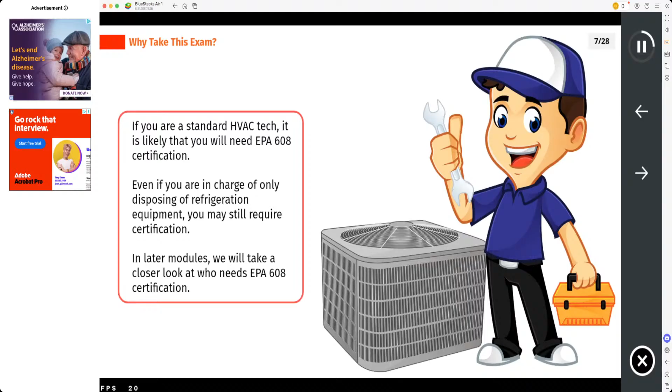The law is subject to change. The EPA may update regulations to make them more strict.

I ain't gonna lie. Damn. Yeah, I'm saying all of these. Fucking all of these.

There are 4 types of EPA 608 certification. All types of EPA certification include EPA Core, which comprises essential content necessary for all certifications.

The type of certification that you will need depends on what types of systems you will be working on. The 4 types of certification are Type 1, Type 2, Type 3, and Universal. All EPA certifications contain 25 questions from EPA Core.

Oh wait, 25 questions, that's it? Ooh, I didn't know. Let's go back, you're moving too fast.

For example, if I want Type 1 certification, there will be 25 questions on the content on EPA Core and 25 questions on Type 1 specific content.

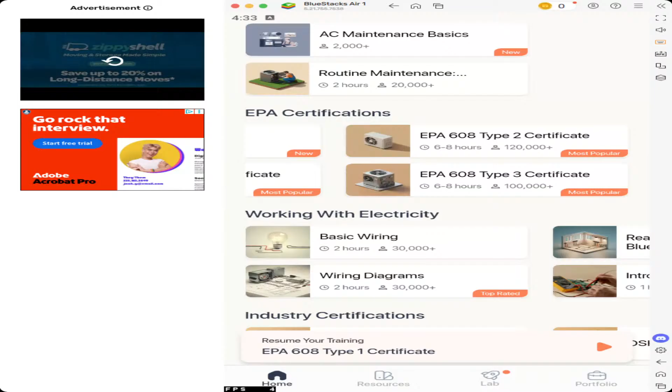What? Yeah, we wanted Type 2. What the? Good for you. So like, oh my God. Oh yeah. It's like the Holy Grail here. Damn. Why would I want a 609?

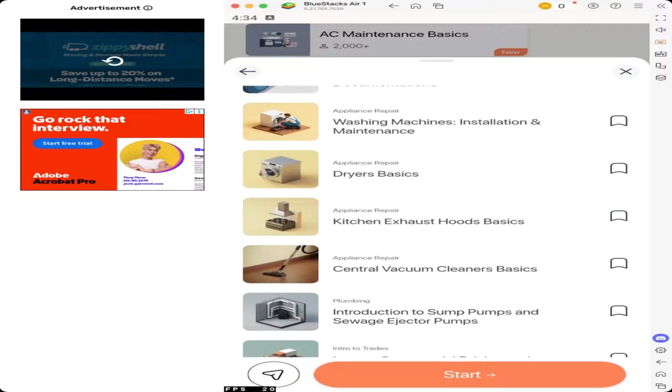All right, fuck it, we going big. Fuck it, we getting it. It's a lot of information. This is the first lesson? Real? I guess this assumes you already had prior knowledge.

This module brushes up on the physical concepts that are the foundation of how refrigeration systems work.

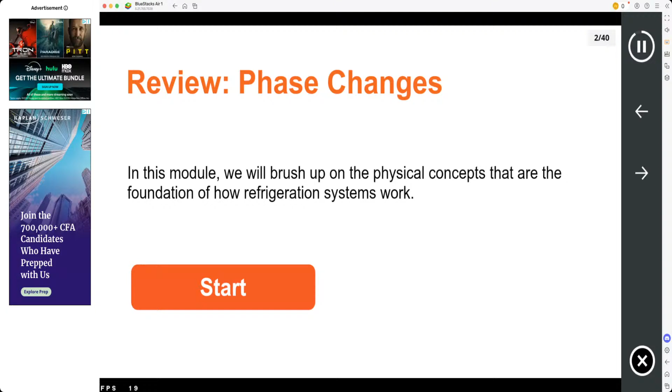The state that a substance is in depends on both its temperature and pressure. If we change the pressure, temperature, or both, we can change the state of the substance.

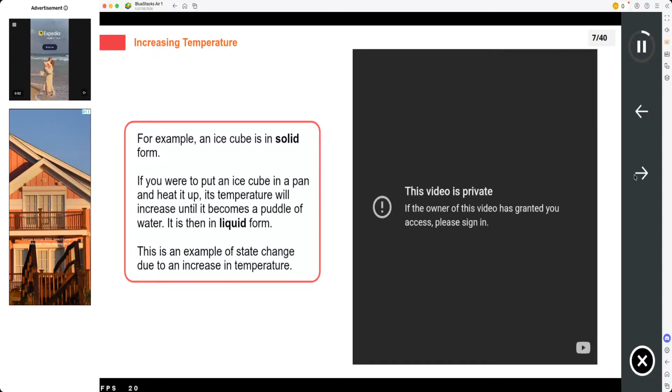For example, an ice cube is in solid form. If you put an ice cube in a pan and heat it up, its temperature will increase until it becomes a puddle of water. It is then in liquid form. This is an example of state change due to an increase in temperature.

In the same example, as you continue to heat up the water, it will increase in temperature until it bubbles up and becomes steam. The steam that leaves the pan is water in its vapor phase.

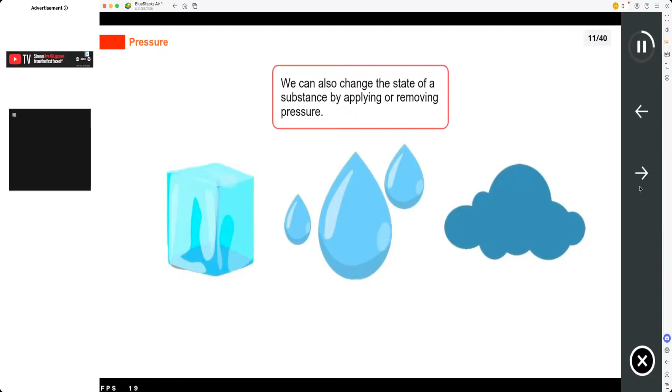Decreasing temperature can also change the state of a substance. We can also change the state of a substance by other means.

As mentioned in the video, increasing the pressure acting on a bubble changes the vapor to liquid. Decreasing the pressure acting on the bubble changes liquid to vapor.

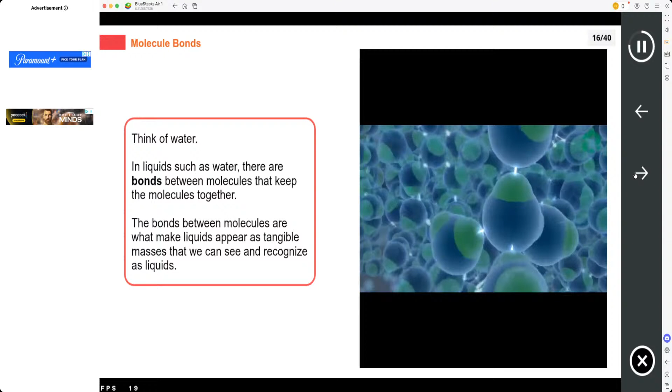Recall that temperature is a measure of how fast the molecules are moving in a substance, on average. The higher the temperature, the faster the molecules are moving inside the substance. For example, molecules in a hot coffee would be moving faster than cold coffee.

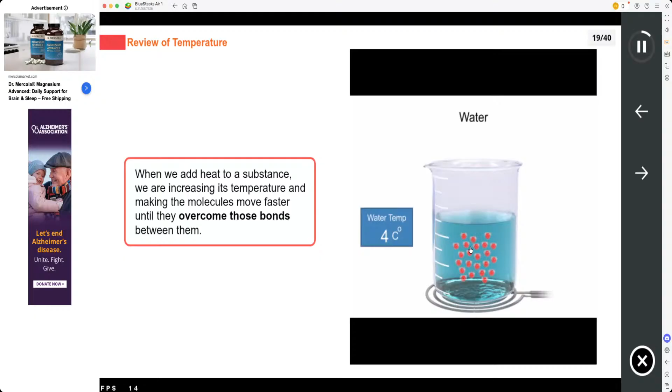When we add heat to a substance, we are increasing its temperature and making the molecules move faster until they overcome those bonds between them.

As temperature increases, the molecules overcome their bonds, and they no longer form a liquid. Instead, by overcoming those bonds, the molecules undergo the process of boiling.

Remember, we need to add heat to a liquid. This heat is drawn from the surroundings.

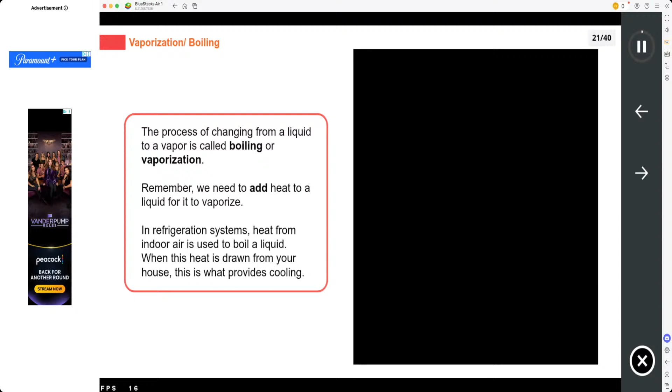The boiling point is the temperature where a liquid changes phase to a vapor. Each substance has its unique boiling point depending on its physical properties.

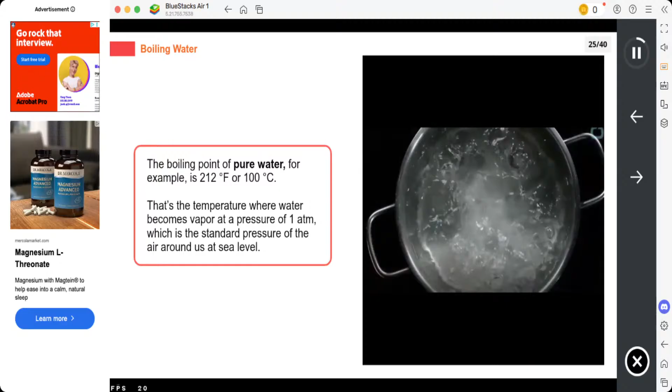Recall that the boiling point of a substance depends on pressure. The boiling point of pure water, for example, is 212 degrees Fahrenheit. Note that the boiling point will be different if your substance is not pure water. If we are heating up pure water and the temperature doesn't reach 212 degrees Fahrenheit, the water will not change to vapor.

If the temperature of the water is close to 212 degrees Fahrenheit, you will see a few bubbles forming. This is because the bottom of the pan is in contact with the heat source, so it gets hot faster than the top of the pot.

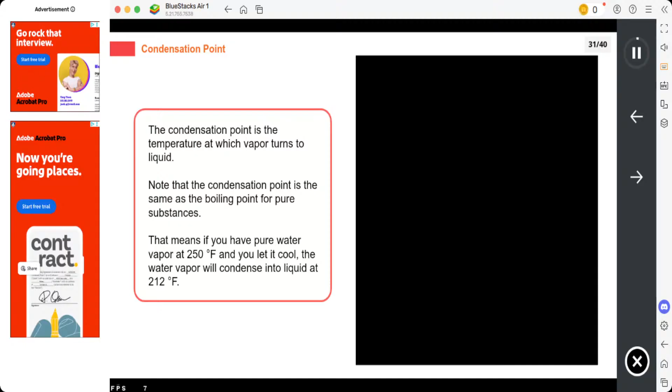The condensation point is the temperature at which vapor turns to liquid. Note that the condensation point is the same as the boiling point for pure substances. That means if you have pure water vapor at 250 degrees Fahrenheit and you let it cool, the water vapor will condense into liquid. Both the boiling point and condensation point are properties of pure substances only.

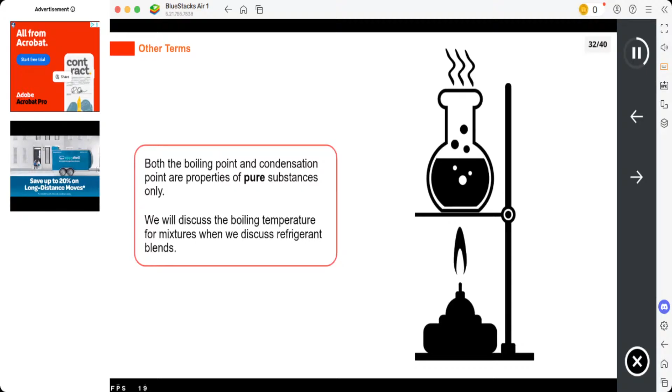As the temperature of a substance is decreased, the substance also changes state.

Condensation occurs when temperature is decreased, changing vapor to liquid. To reiterate, you need to remove heat from a substance to change state from vapor to liquid.

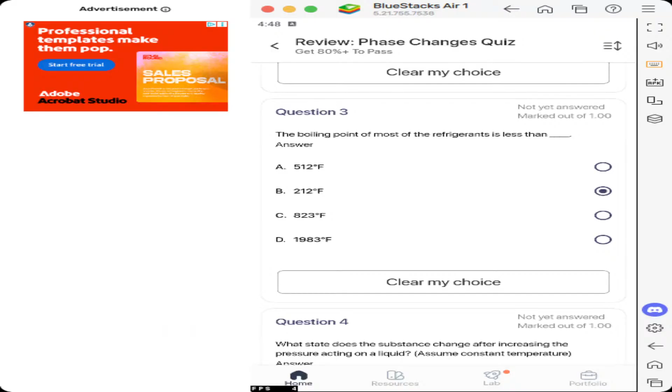212 degrees. Oh wait, hold up. Not gonna lie, I don't know that. No, I'm not gonna lie to you. Hold on.

So we can do this until the test. The test is proctored. It's not an exam, we're good. With the exams...

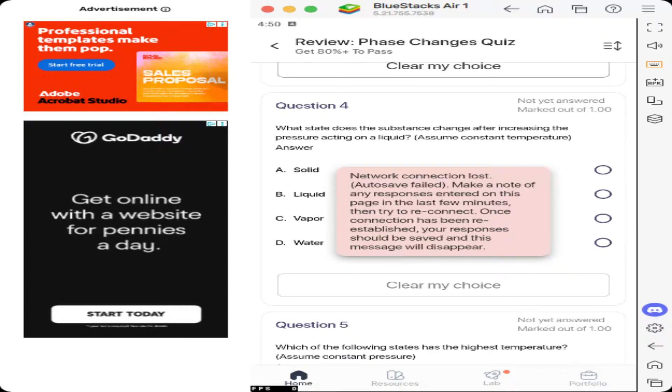In this module, we will go over the refrigeration cycle and how it works to provide cooling. We will use the concepts we talked about in the previous module to understand this. The refrigeration cycle is what makes your air conditioning, refrigerator, or any other refrigeration system work.

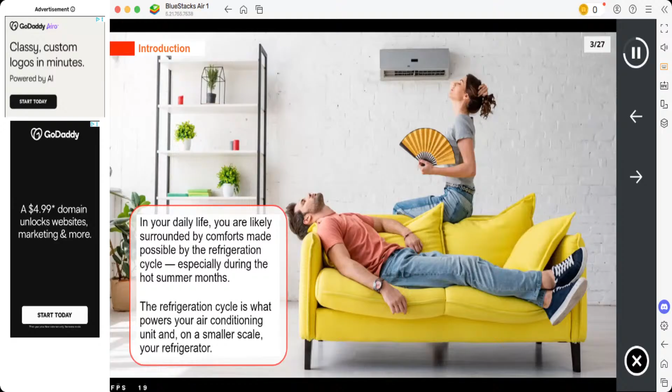In your daily life, you are likely surrounded by comforts made possible by the refrigeration cycle, especially during the hot summer months. The refrigeration cycle is what powers your air conditioning unit and, on a smaller scale, your refrigerator.

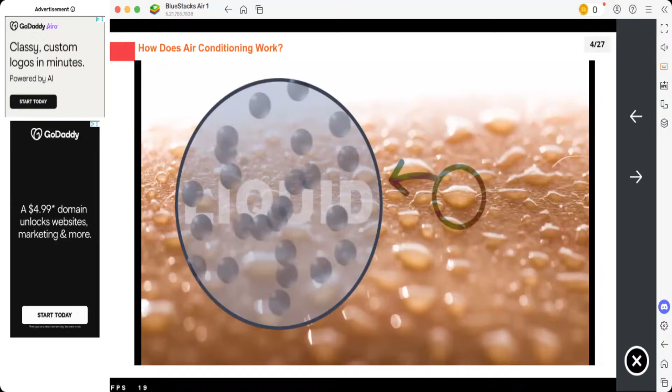The molecules in a liquid are held together by weak intermolecular interactions. Not quite chemical bonds, just enough passing attraction to keep them from flying apart. Some of the molecules absorb enough heat energy, in other words they get moving fast enough, to overcome these intermolecular attractions, escape, and take gaseous form.

That's the reason you feel chilly getting out of the shower, and why we sweat to stay cool. The water has to absorb heat to evaporate, and it carries that heat away from you.

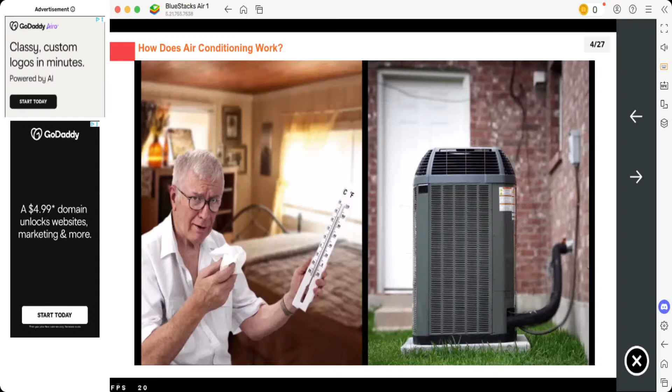An air conditioner's basic job, then, is to use a fluid called a refrigerant that constantly changes from a liquid to a gas and back to a liquid again, to move heat from one place, like your sweaty bedroom, to another, outside, where it's already hot and miserable anyway, so who cares?

Here's an admittedly very simplified version of how most AC units work. The liquid refrigerant flows through a series of coils exposed to the air in your home. The refrigerant has a low boiling point, so the heat from the interior air is enough to make it turn into a gas, which means there's now more heat in the refrigerant and less in the air. A fan blows that colder air into your room, or straight into your face.

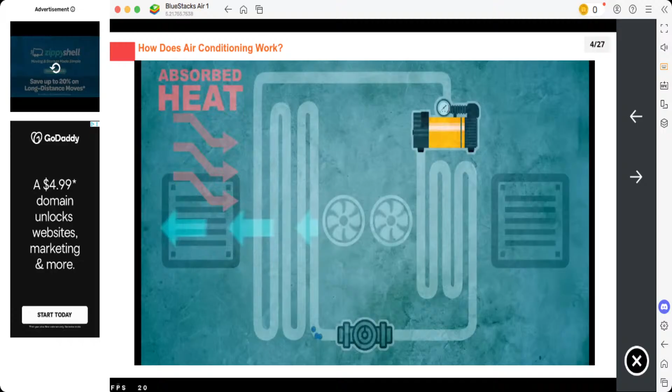We're not judging. So now your AC has to do two things: dump the heat absorbed by the refrigerant outside, and condense the refrigerant back into a liquid so it can be used again. To do those things, it uses a compressor to ramp up the pressure on the gaseous refrigerant, so much that it can condense into a liquid again, even though it's at the warmer outside temperature.

As it condenses, the refrigerant loses heat to the air around it, which another fan blows outside where it's already all sticky anyway. Which is a neat trick, boiling something at a low temperature and then condensing it at a high one. Nothing in thermodynamics is free, and the compressor needs energy to do the work of compressing the refrigerant, which may explain your power bill in July.

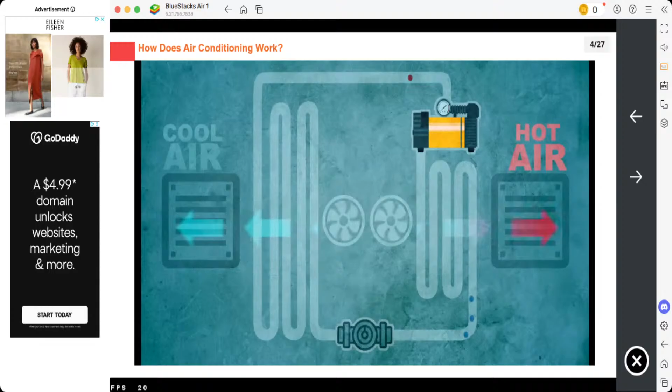After the refrigerant condenses, the air conditioner backs off the pressure with an expansion valve, so that the refrigerant can boil at the lower temperature again, which it does, in a loop, over and over, until your home reaches the temperature you set the thermostat to, or your housemates complain and switch it off because, what are you, a polar bear or something? Jeez. While the refrigerant could be practically any substance, there are some chemicals that do the job better than others, and these refrigerants have a checkered history.

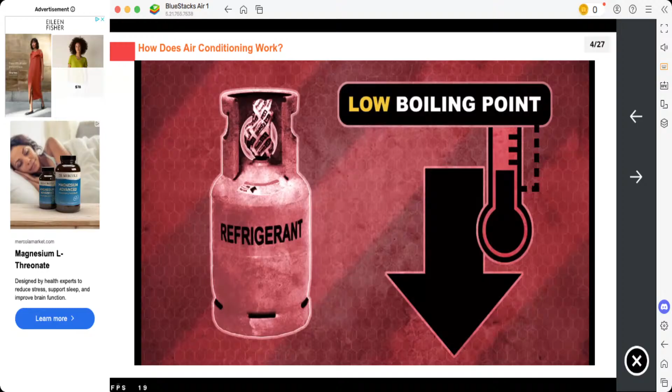A refrigerant needs to have a pretty low boiling point, and one that can be adjusted to where you want it by changing the pressure on it. It should also be pretty good at conducting heat and be able to absorb a lot of heat as it boils. And then it needs to be cheap, widely available, and as non-flammable and non-toxic as possible. That all kind of narrows your choices of chemical.

Scientists thought they'd found the perfect refrigerant with Freon, which is the trade name of a group of chemicals called chlorofluorocarbons. But CFCs are actual murder to the ozone layer. They've been largely replaced with hydrofluorocarbons, or HFCs. HFCs don't damage the ozone layer, which is good, but they have a different problem: they're greenhouse gases. So the search is on to phase out HFCs too.

Whatever we use in the future, it doesn't seem likely that we'll give up on AC altogether. Not in a scorching summer like this one.

Definitely learned something. As mentioned in the video, air conditioning works by absorbing heat from your indoor air and ejecting it outdoors. It uses a refrigerant to do this. A refrigerant is usually a liquid that's used in refrigeration systems to absorb heat.

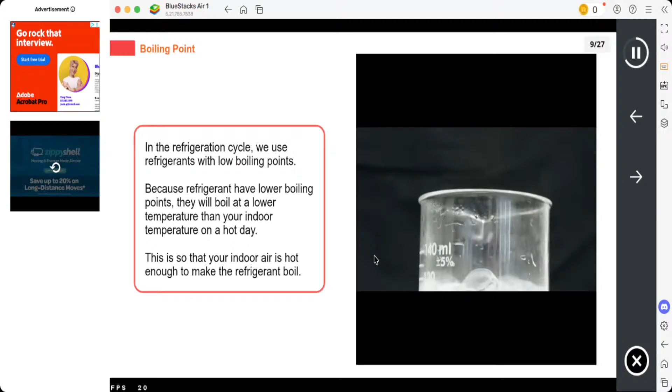It does this by passing a refrigerant with a low boiling point through a series of coils that come in contact with warm indoor air. Recall that a boiling point is the temperature at which liquid turns to vapor. In the refrigeration cycle, we use refrigerants with low boiling points. Because refrigerants have lower boiling points, they will boil at a lower temperature than your indoor temperature on a hot day. This is so that your indoor air is hot enough to make the refrigerant boil.

For example, a hot summer day would be around 90 degrees Fahrenheit. A typical refrigerant, R134A, has a boiling point of minus 15.34 degrees Fahrenheit. Since the hot summer air is above the boiling point of the refrigerant, it would boil at that temperature.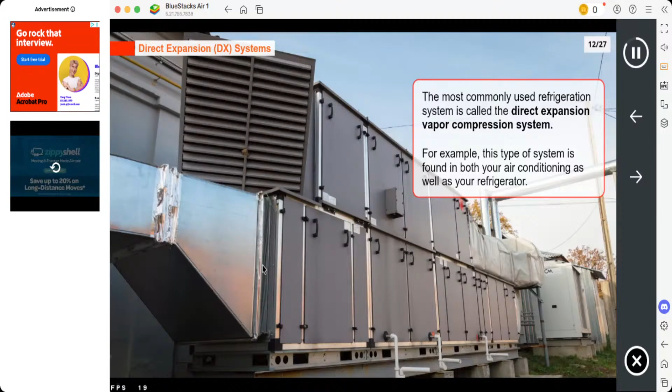Direct expansion systems are systems where the cooling effect comes from the expansion of a liquid to a vapor. If we think about water vaporizing to steam, the steam rises up and fills the air. This is the expansion behavior of vapors.

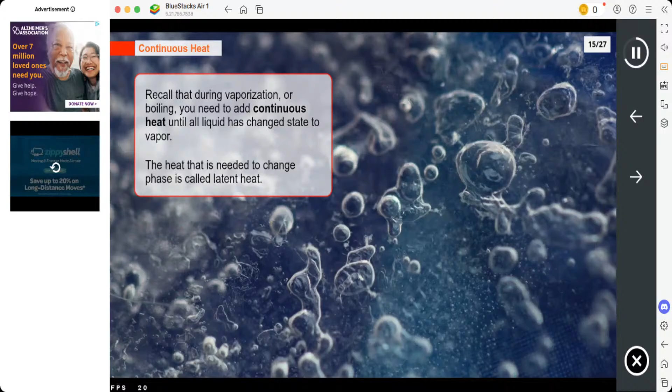As the refrigerant boils, it changes state from liquid to vapor. This process is also called vaporization, as the refrigerant is changing from liquid to vapor. Recall that during vaporization, or boiling, you need to add continuous heat until all liquid has changed state to vapor. The heat that is needed to change phase is called latent heat.

Think about boiling a pot of water. You apply heat to it by turning on the stove, which increases the temperature of the water. Once the water reaches its boiling point, it starts to bubble and turn into steam, which leaves the pot and dissipates into the air.

If you keep the stove on, you are continuously applying heat to water that is already at its boiling temperature. More and more water molecules will become steam, also known as water vapor. If the stove is left on, the water in the pot will decrease until all the water eventually turns to vapor. You've probably seen this if you've accidentally left the stove on too long. Either the pot has completely dried up or there is much less water than before. This is because water has changed state into vapor.

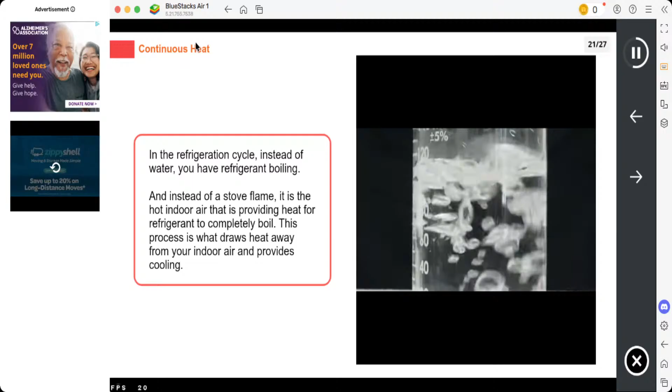In the refrigeration cycle, instead of water, you have refrigerant boiling. And instead of a stove flame, it is the hot indoor air that is providing heat for refrigerant to completely boil. This process is what draws heat away from your indoor air and provides cooling.

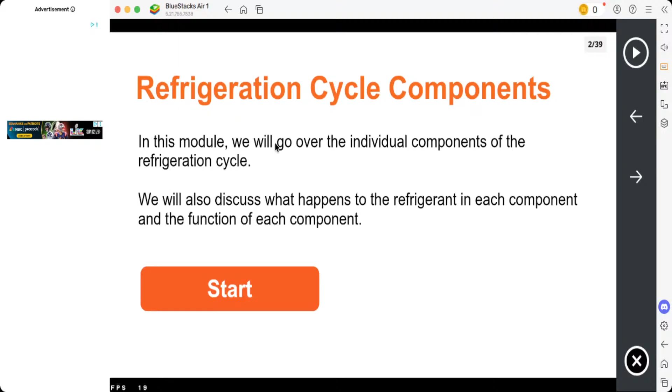Aside from the refrigerant flowing through the system, the four key components of a refrigeration cycle are: evaporator, compressor, condenser, and metering device, also known as a thermal expansion valve, or TXV.

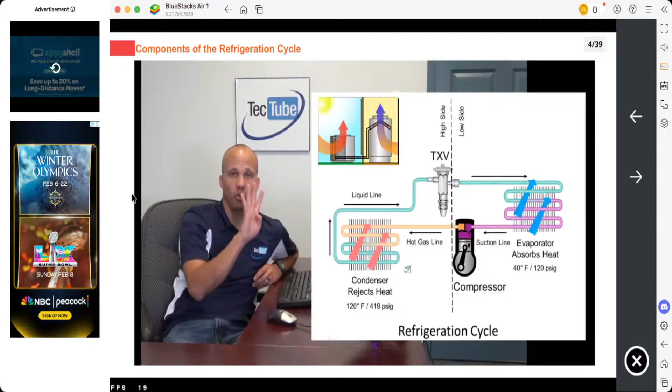So when I look at the piping diagram here, I have four major components on a refrigeration cycle. I have my condenser coil out in your yard, that's part of your condensing unit. I have a compressor, which is also part of your condensing unit. Then inside the building, I have my evaporator coil and my TXV. The TXV and evaporator coil are typically in one assembly as well. So visually it looks like I have two things, but really there's four major components of the refrigeration cycle. The condenser coil and the evaporator coil are doing opposite jobs of each other, and the TXV and the compressor are doing opposite jobs of each other.

Evaporator coils absorb the heat. Compressors compress the refrigerant.

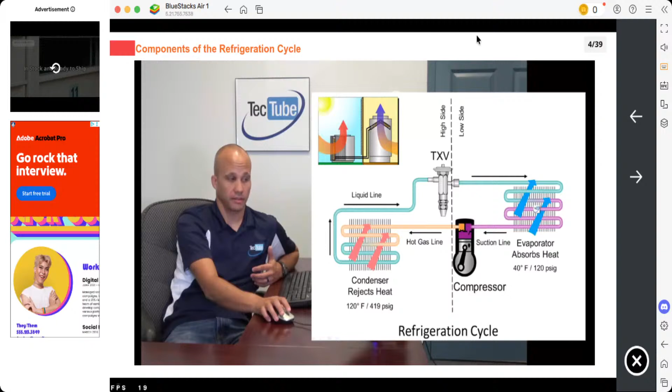You notice we have some of the pipes labeled on here. The hot gas line between the compressor and the condenser, you don't normally see that. That is internal to a condensing unit, because the condensing unit, if you recall, has the condenser coil and the compressor all in one. So you don't see that hot gas line typically. The liquid line and the suction line are the two lines that you see going from outdoors back indoors to the inside the building. And then the line between the TXV and the evaporator is typically all in the evaporator coil as well, so you don't see that unless you take the cover off.

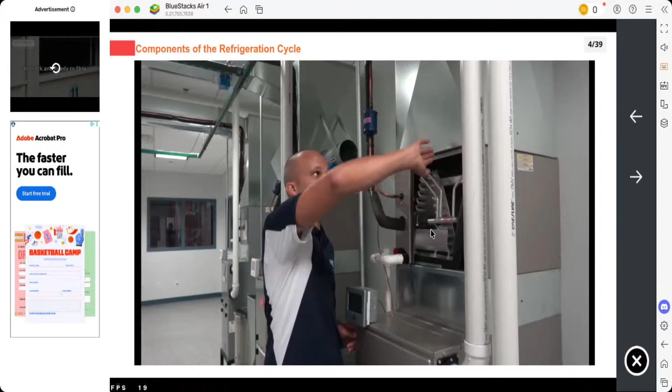Here we are in the lab. We have a furnace with an evaporator coil on top of it. Air from the building or the home is coming through the furnace, because that's where the blower motor is, running air through the evaporator coil, where the evaporator coil can absorb heat from the building, and then the air gets cooled down, obviously, when we give up its heat and gets ducted out to the supply. So that heat goes into the evaporator coil, and then that heat will make its way through the suction line, in our case, up over the ceiling in the lab here, and it'll come down into our condensing unit.

And then as it comes into our condensing unit, the suction line goes into the compressor, where the compressor increases its pressure and hence increases its temperature. Then it leaves the compressor on the hot gas line.

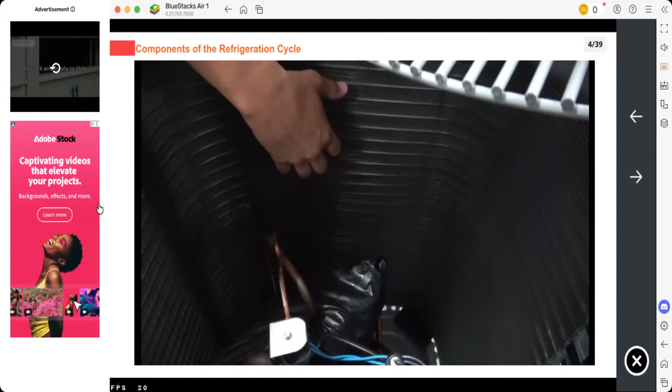If we follow that pipe all the way around, that hot gas line goes into the condenser coil, where it can use all this surface area to reject the heat to the outdoors. And then when it comes back out of the condenser coil, it goes into the liquid line.

The liquid line will make its way back through the piping system, back into the indoor side of the building, and it'll come in this way, going into our TXV. The TXV's job, once again, is to lower the pressure and hence lower the temperature.

So we have cool refrigerant entering the evaporator coil, where it's now cool enough that it can absorb more heat from the air. And then that cycle will repeat itself, hence why we call it the refrigeration cycle.

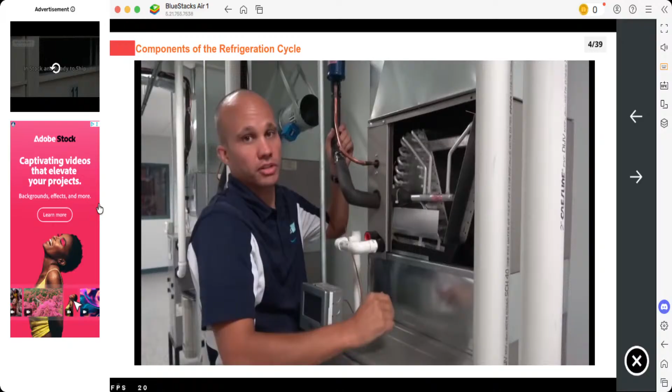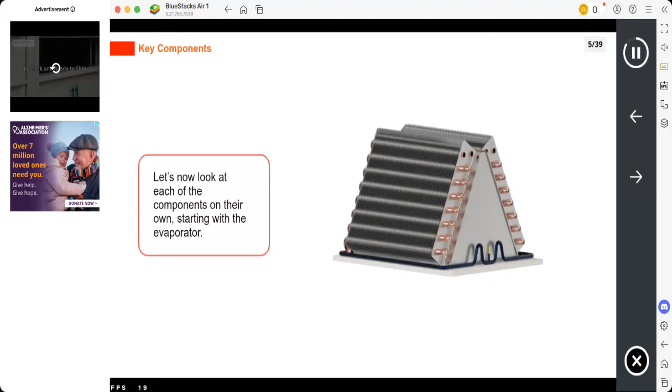Oh yeah, refrigeration cycle. We love the refrigeration cycle. Not venting gases into the air and stuff like that. With the evaporator, love that. Imagine me locking in on this today. I'll put in a 12-hour shift on this.

I don't care. In my basic refrigeration description, I talk about the evaporator as being the heat absorber.

My collar's blue and my neck is red.

That's really what we're trying to do when we're attempting to cool something: we make the evaporator coil a lower temperature than either the room or the box and the air going over it, so heat goes out of that room or refrigerator box or freezer and is attracted into that evaporator coil. For most typical basic systems, we're just flowing air over the evaporator coil, over those fins, and as it passes across that metal and the refrigerant moves through, it's absorbing heat through the metal into the refrigerant.

The fins on those coils that you'll often see act as additional surface area to give it a little bit more contact time, so that as that air is passing over, it has more contact time on the metal, so the refrigerant inside that evaporator coil can absorb heat.

That's it? Where's the rest of it?

The evaporator is located inside the home. This is where refrigerant absorbs heat from indoor air, changing from liquid to vapor.

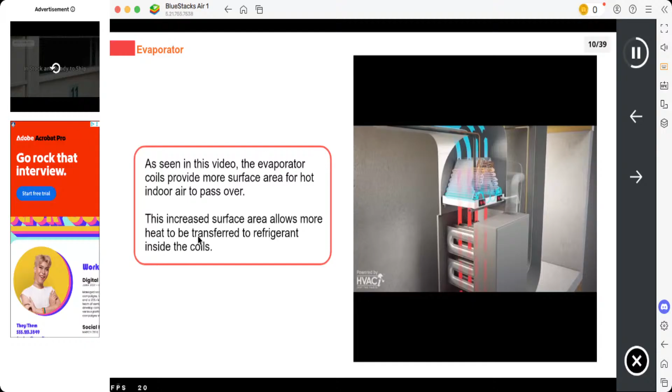As seen in this video, the evaporator coils provide more surface area for hot indoor air to pass over. This increased surface area allows more heat to be transferred to the refrigerant inside the coils.

Refrigerant gets extra heated past its boiling point, which makes it superheated vapor by the time it leaves the evaporator. This change into a superheated vapor state is indicated in the color change of the coils from blue (liquid) to red and yellow (vapor). Vapor refrigerant is let out from the evaporator to the next component, the compressor.

Okay, we, shit. Metering device. Compressor.

Talk about this in a metaphor. Imagine the room that you're in right now, whatever room you're in, it's got the four walls that surround you, and then it's got the ceiling. Now imagine that this room you're occupying is full of ping pong balls, and these ping pong balls bounce around perpetually, always bouncing. These ping pong balls signify molecules, and the energy that these molecules contain that causes them...

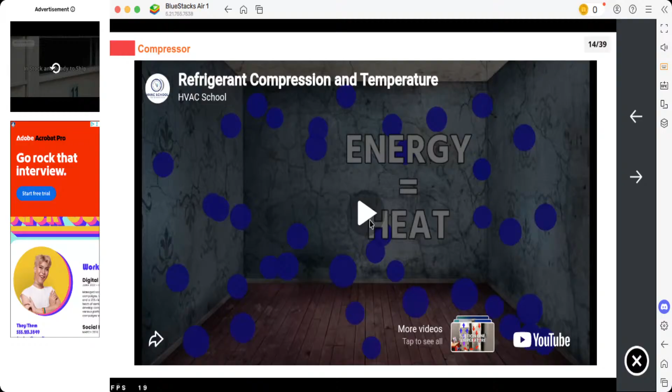Nah. Alright bro, these ain't ping pong balls doing that, man.

To bounce around, that's heat. But the speed those molecules or ping pong balls are moving at, that is temperature. In fact, temperature literally is average molecular velocity. I talk about this a lot on the podcast and in these videos. So when you feel something as hot, what you're really feeling is those molecules bouncing around or vibrating very fast in that thing you touch. When you touch that hot stove, you're literally coming into contact with molecules that are bouncing around really fast.

Your fingertips bounce around really fast, which can be quite uncomfortable, cause burns. So when we experience temperature, we are literally experiencing the molecular velocity of whatever substance. This little bottle of water, the temperature that I feel, my fingers are experiencing through conductance the molecular velocity, or the speed that the molecules are moving.

So back to our room. You have this room full of ping pong balls that are bouncing. The amount of overall energy that they contain is the heat. The speed that they're moving is the temperature, and the ping pong balls themselves are the molecules. In this case, it's refrigerant.

Now imagine that one of these walls begins moving in, sort of like the scene from Star Wars where the room is getting smaller and smaller and it's supposed to be crushed. So as the wall moves in, what happens to these ping pong balls? Do they speed up or do they slow down?

This wall, as it moves in, is working against the force of those balls bouncing off of it. And as it does that, the speed of those balls as they bounce against the wall and against each other starts to increase. The molecular velocity begins to increase, and so the temperature increases. Because again, remember, molecular velocity is temperature, the same thing.

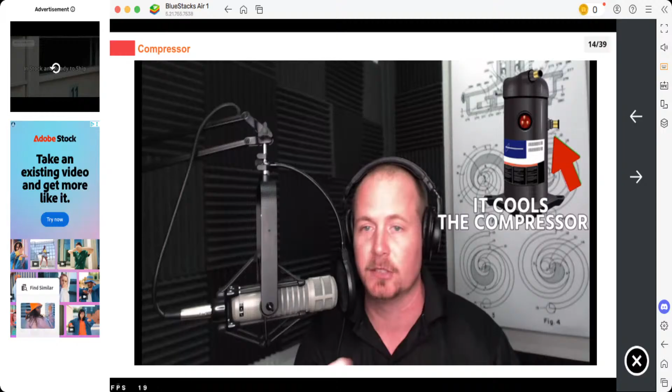And so that's what's happening inside of a compressor. If you think of this scroll compressor behind my shoulder, it goes in as vapor. In fact, how it really works inside a compressor is the suction line refrigerant drops into a refrigerant-cooled compressor's shell. It cools the compressor, kind of mixes with the oil, and then it's pumped out into the head where it's discharged.

There is some heat added to the compressor itself to cool it from the different parts inside, the friction, the bearings, and all that. There is some heat generated there, but really the bulk of that temperature change that we're seeing, say on average on an air conditioner, an average suction line temperature would be about 50 degrees. Then coming out of the compressor you'll commonly see about 165, 170 degrees. So that's a significant difference in temperature, say a 120, 130 degree differential.

And that differential is representative primarily of that heat of compression, which is, as the compression chamber gets smaller and smaller, the molecules in there are bouncing faster and faster.

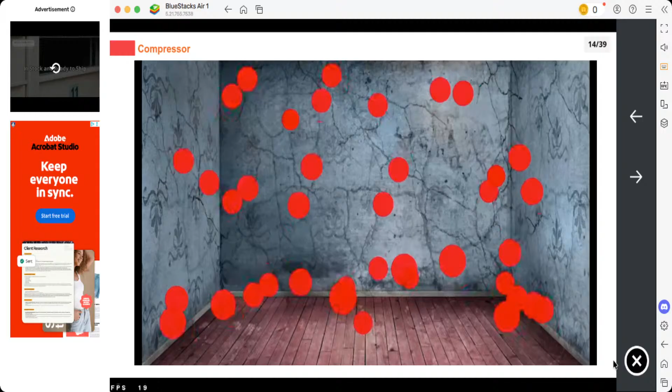So a way of thinking about this is when you add pressure, you increase temperature. This is part of the gas laws. When you add pressure, you increase temperature. And by increasing temperature, now we can get that heat back out of the refrigerant.

In the condenser. So what does the compressor do? Well, it compresses, obviously. Like we said, it causes the refrigerant to occupy a smaller space. In doing so, that increases the temperature. And by increasing the temperature of that suction gas, now we can get the heat back out, because hot goes to cold. So that's what that compressor does.

In addition to that, with refrigerant-cooled compressors, which is the majority of what you work on in air conditioning or small refrigeration, that suction gas also serves to cool that compressor. But primarily what's happening is you have that heat coming down that suction line at a low temperature, it goes into that room that then squeezes those ping pong balls together. The molecular velocity greatly increases, and now we can run it into the condenser where we can remove the heat from it again, and they slow back down again, and it can then turn into a liquid.

So that's just a basic look, and that's one of my favorite metaphors to explain what's going on inside a compressor, because when you sit in that room and imagine those ping pong balls bouncing around, it just gives you a way to envision what's going on. Just remember, in that metaphor, the ping pong balls are the refrigerant molecules bouncing around, and the speed that they're moving, or the velocity, equals the temperature.

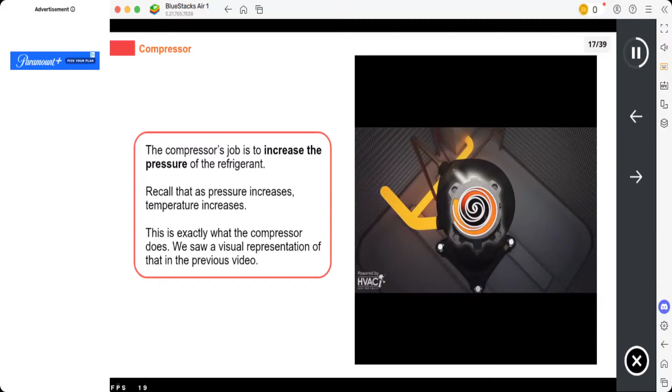This is exactly what the compressor does. We saw a visual representation of that in the previous video.

Shit, I was not looking at that. I'm not gonna lie. Like, when are you ever gonna see the inside of a compressor, nigga?

To increase the pressure.

For sure, come on. The vapor leaving the compressor is lower in pressure than vapor entering the...

Nah, because we're increasing the pressure, right? Wait, nah. Why they phrase that like that?

What the fuck? Refrigerant is then sent from the compressor to the next component, the condenser.

No. Because, like, if it would change state, then what's the point of the TXV? You know? So yeah, we love TXV. I think that's what I learned in school. Yeah.

Do it. Well, the condenser has to reject heat. That's its job, it's the heat rejector. So it has to reject heat to something, and in this case it's generally air. Your typical air conditioner at your house, a split system, package unit, window unit, whatever, it's generally the air. But it can also be water.

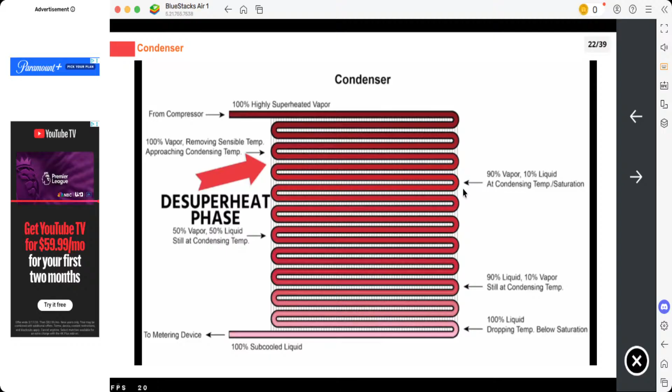The desuperheating phase brings it to the condensing temperature, which is that first little bit at the top. Then you have the condensing phase, which is through the bulk of the condenser. And then at the end, that's when you have the subcooling phase, which is the drop below the saturation temperature.

You can only have subcool once the refrigerant is fully liquid. You can only have superheat if it is fully vapor, and that condensing temperature segment is all there in the middle. So it's like watching a boiling pot of water, but in reverse. It's changing from vapor to liquid instead of liquid to vapor. That's your...

The condenser is located outside the home so that coils containing the refrigerant can come into contact with outdoor air. The condenser's job is to reject heat to the outside air.

So we got two potential answers here. And I got it right.

Refrigerant is sent from the compressor to the condenser via the hot gas line, since refrigerant exits the compressor as a hot, high-pressure gas. As seen in the video, the condenser is housed in the same unit as the compressor.

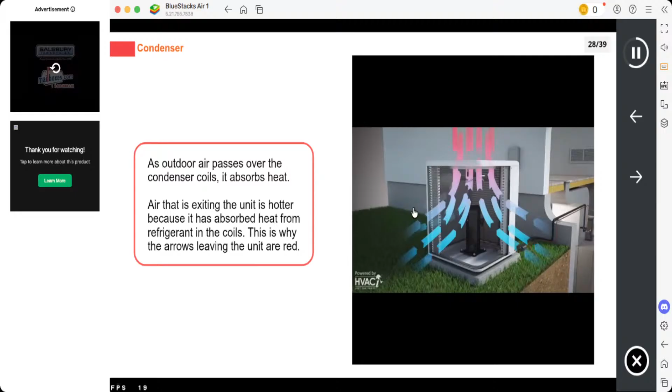As outdoor air passes over the condenser coils, it absorbs heat. Air that is exiting the unit is hotter because it has absorbed heat from refrigerant in the coils. This is why the arrows leaving the unit are red.

Think of a steaming mug of coffee. Because it is hotter than the surrounding air, heat will transfer from the coffee to its surroundings. You can feel the heat transfer out when you wrap your hands around the mug. Recall that heat transfers from high heat to low heat. This is basically what happens in condenser coils.

Recall that as temperature decreases in a substance, it will condense, which is the process of changing from vapor to liquid. As discussed earlier, we see this commonly on windows on a cold day. Heat transfers from water vapor in the air to the cold windows, condensing the water vapor to liquid droplets.

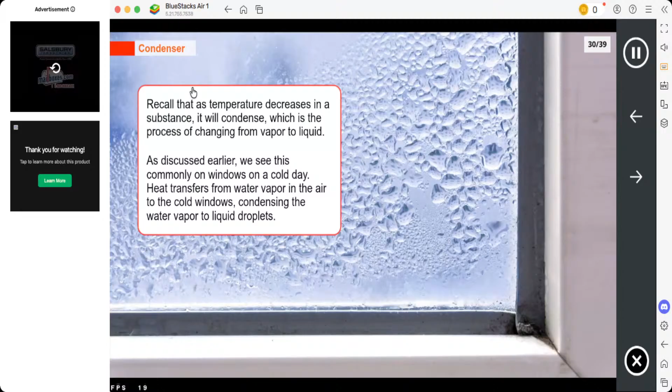In the condenser, heat transfers from the refrigerant to outside air. Refrigerant inside the condenser cools until... I gotta think, bro. It's like I can't focus on two things at once. Let me answer this question.

In the condenser, the refrigerant changes state. No. Oh, really?

Okay, refrigerant is then sent from the condenser to the next component, the metering device, or thermal expansion valve, TXV.

TXV. Condenser is doing the opposite job of which component? Can't do that on the test.

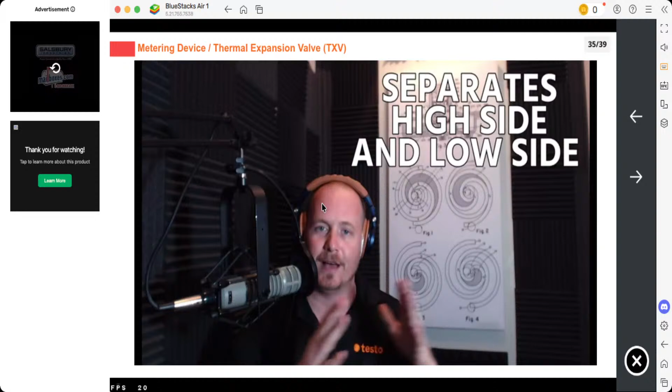TXV is a type of metering device, and the purpose of the metering device is to act as a pressure dropper. It's there to create a pressure drop, and so it separates the high side and the low side of the system. If you look at the basic refrigerant circuit, you'll notice that the compressor and the metering device kind of split that circuit in two, where the compressor is the pressure increaser, and the metering device is the pressure dropper before it goes into the evaporator coil.

So think of it this way: the compressor has to pressurize the refrigerant before it enters the condenser in order to get the heat out, and the metering device has to drop the pressure before it goes into the evaporator coil to get the heat in, because when you drop pressure, you drop temperature. When you increase pressure, you increase temperature. You have to manipulate temperature in order to get heat in and out of things, which is what we're doing. We're getting heat in and out of things.

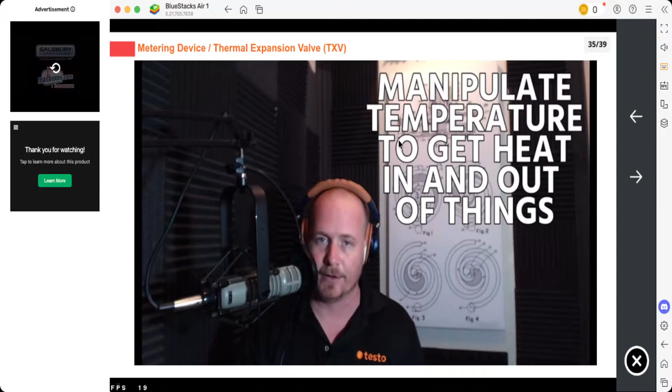So there are several different types of metering devices. You have capillary tubes, pistons, TXVs, and electronic expansion valves. There's a few other more exotic types of metering devices that you'll read about in books, and we're not going to talk about those here - automatic expansion valves, high side, low side float systems, and so on. But we're going to focus on these four and talk a little bit about the general purpose of the metering device. So we know it's a pressure dropper.

How does it do it? Well, it drops pressure by basically creating a small passageway that the refrigerant has to go through. So pressure is built up on the inlet side, and then on the outlet side, there is a drop because it goes through a very small area, and then it opens up into a larger volume.

So when we think about the relationship between pressure, volume, and mass, we know that if you increase volume, then you decrease pressure. And what we're doing is increasing volume because it goes into an evaporator coil out of a liquid line.

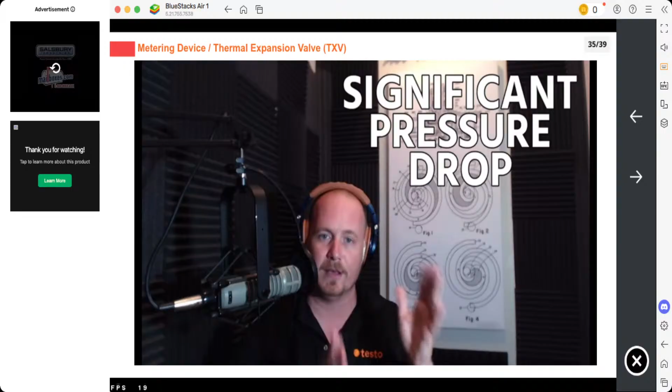A liquid line is a smaller line that goes into this larger volume of space into an evaporator coil, so there's an increase in volume. But we're also controlling the amount of flow moving in, so we're controlling how much pressure is able to make it into that evaporator coil. All that said, we end up seeing a pretty significant pressure drop across that metering device.

Ooh, okay, hold up, we might have the method here. Did I just finish that and not even... okay, hold up. Yo. Oh, 10 to 12 hours?

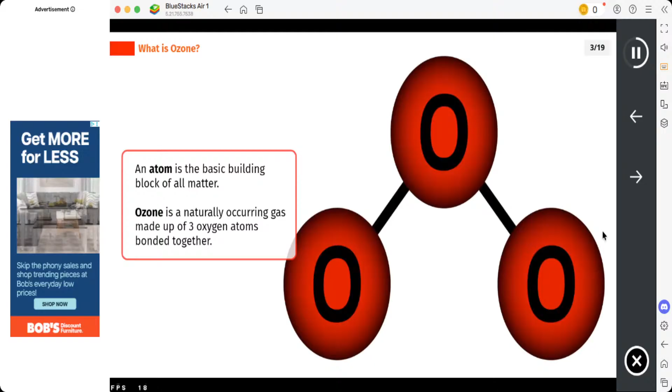Oh yeah, let's learn how we destroy the atmosphere with chlorofluorocarbons. Most ozone is found in the upper atmosphere, where it is produced in small amounts, when the sun's high-energy rays strike ordinary oxygen molecules.

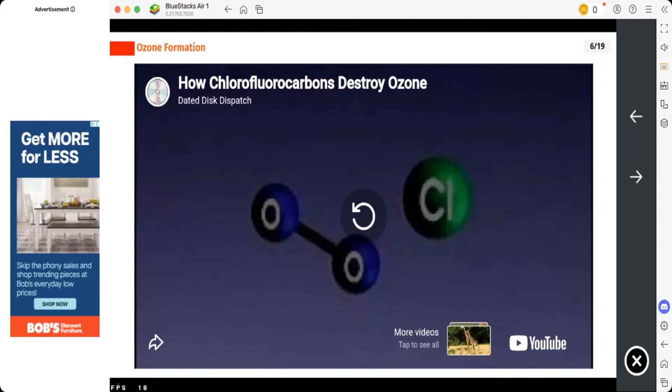An oxygen molecule is made up of 2 atoms. In the atmosphere, the sun's high-energy rays break the bond between the 2 atoms. Each free atom then bonds with other pairs to form ozone molecules.

Definitely need the video example. Come on, 15 to 35 kilometers above Earth's surface, a gas called ozone surrounds the planet. The ozone layer acts as a barrier between Earth and ultraviolet radiation from the sun. However, pollution has caused the ozone layer to thin, exposing life on Earth to dangerous radiation.

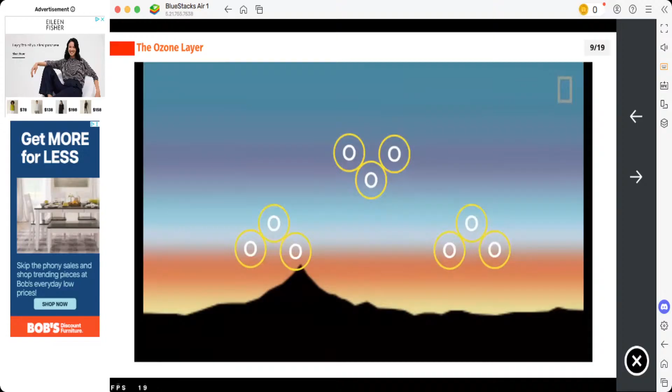Earth's atmosphere is made up of 5 layers. The second layer, called the stratosphere, contains the ozone layer. The ozone layer is made up of a highly reactive molecule called ozone, which contains 3 oxygen atoms. Ozone is a trace gas in the atmosphere, there are only about 3 molecules for every 10 million molecules of air. But it does a very important job. The ozone layer acts as Earth's sunscreen, absorbing about 98% of damaging ultraviolet or UV light.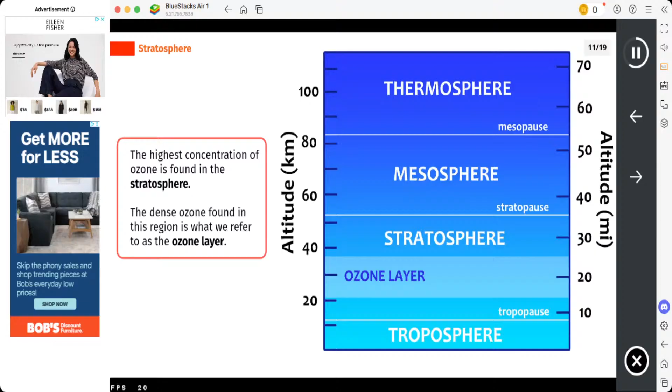Ozone is found in the stratosphere and troposphere, with the highest concentration in the stratosphere. This dense ozone is what we refer to as the ozone layer. The sun emits high levels of ultraviolet radiation, which is harmful to humans. The ozone layer protects us by absorbing and reflecting this radiation before it reaches Earth's surface. Most of the sun's ultraviolet rays don't make it past the stratosphere.

Ozone can also be found in the troposphere, the lowest layer of the atmosphere. At ground level, it's mainly in the form of smog, created by chemical reactions between pollutant emissions and sunlight. Smog is considered a harmful pollutant because of its effects on humans and the environment. In high concentrations, it can cause respiratory damage when inhaled and destroy plant life by restricting photosynthesis.

To summarize, there are two types of ozone. Stratospheric ozone performs the essential function of absorbing and reflecting harmful UV rays from the sun. Ground level ozone is generated from pollution and is harmful to human health.

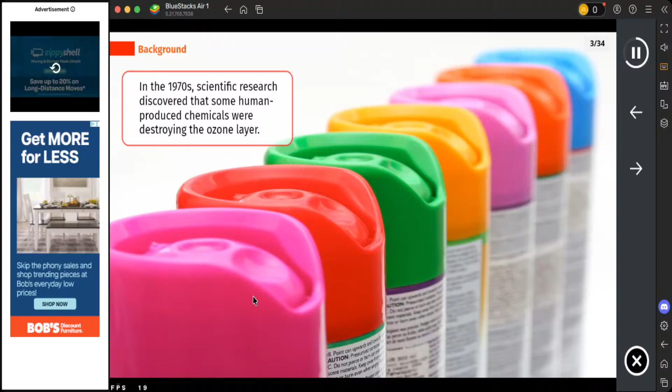In the 1970s, scientific research discovered that some human-produced chemicals were destroying the ozone layer.

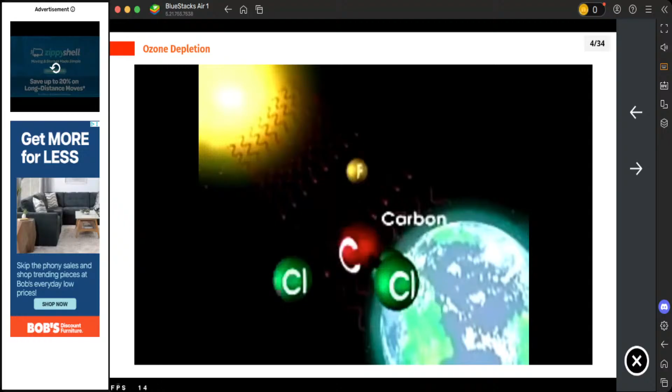Ozone molecules in the upper atmosphere absorb most of the sun's harmful ultraviolet rays before they reach the Earth. These rays can cause skin cancer and other health problems. A group of gases called chlorofluorocarbons, or CFCs, may pose a threat to the ozone layer. CFCs are chemical compounds made up of atoms of chlorine, fluorine, and carbon, used as refrigerants and to make plastic foam insulation. Because they are gases, CFCs can escape from poorly sealed containers into the atmosphere.

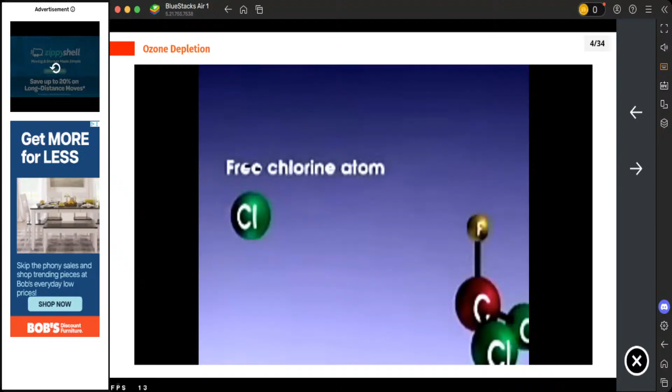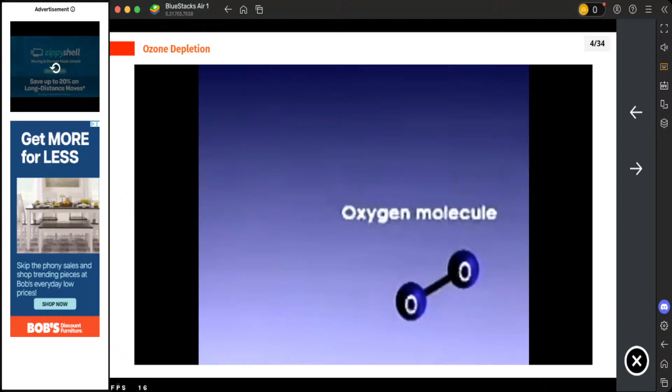Once CFCs are in the upper atmosphere, scientists believe a chain of reactions occurs that destroys ozone. First, high-energy ultraviolet rays break chlorine atoms free from the CFC molecule. These free chlorine atoms can react with other molecules in the atmosphere. When a chlorine atom reacts with an ozone molecule, it steals one of the ozone molecule's three oxygen atoms, forming a molecule of chlorine monoxide. The remaining two oxygen atoms form an ordinary oxygen molecule. In this way, an ozone molecule is destroyed.

Chlorine monoxide reacts easily with single oxygen atoms in the atmosphere, leaving a free chlorine atom that can destroy more ozone. Scientists estimate that one chlorine atom can destroy as many as 100,000 ozone molecules.

The main chemicals at fault for this destruction are CFCs, which stand for chlorofluorocarbons, and HCFCs, which stand for hydrochlorofluorocarbons. CFCs and HCFCs are categories of refrigerants. They were once used in almost every refrigeration and AC unit before it was discovered that they were destroying the ozone layer. The most harmful refrigerants in terms of ozone depletion are CFCs, because there are more chlorine molecules in CFCs than HCFCs.

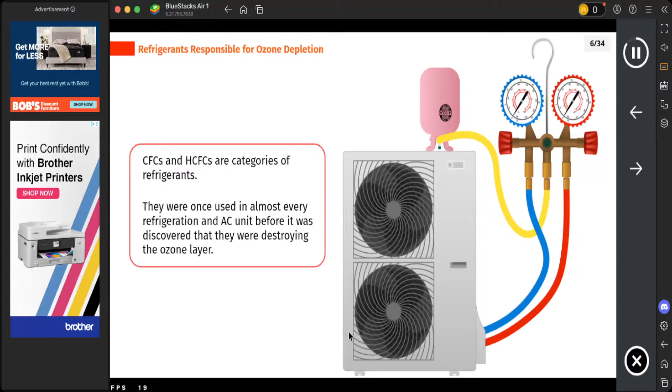When CFCs and HCFCs reach the atmosphere, UV radiation breaks their bonds to release their chlorine atoms. These free chlorine atoms bond easily with one of the oxygen atoms in the ozone molecule, and in the process break apart the ozone molecule. Each chlorine atom destroys an ozone molecule as it binds with one of its oxygen atoms to form chlorine monoxide and oxygen.

The chlorine monoxide molecule moves around the atmosphere, colliding with more oxygen atoms. Single oxygen atoms bond easily with the oxygen atom in chlorine monoxide. This means a single chlorine atom can break up multiple ozone molecules before it disintegrates.

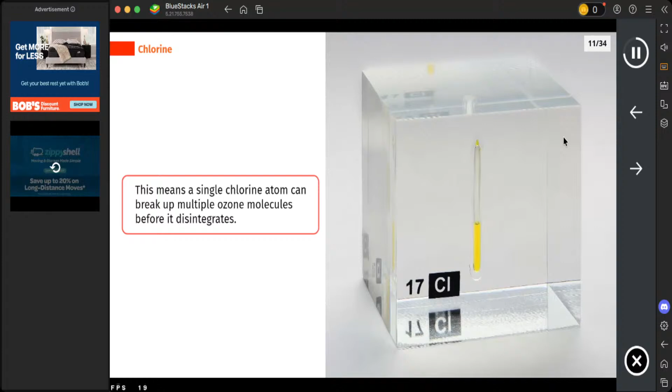CFCs can last 70 to 100 years in the atmosphere before they are naturally broken down. During this time, chlorine atoms repeatedly destroy the ozone layer molecule by molecule. This is why a single chlorine atom can destroy up to 100,000 ozone molecules.